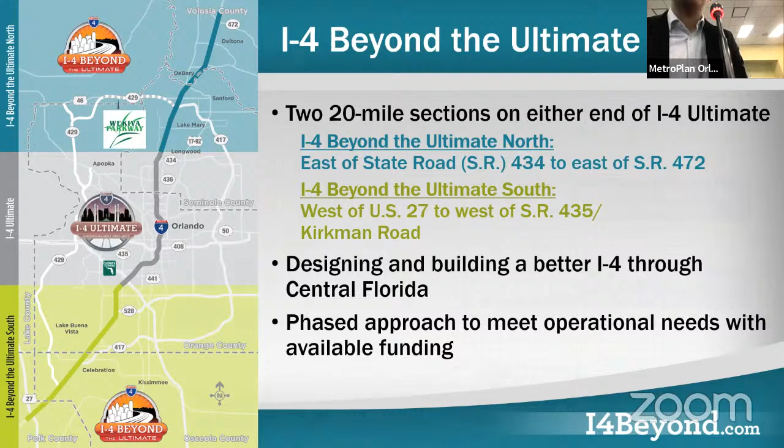So what you see on the screen is all that we have funding for as of now. Not all of these are in the TIP amendment, but we thought we'd go ahead and show you what we have in our funded projects. So we'll start with the first one on the top right. You have 444315-1. That's the I-4 at Sand Lake Road Interchange. We're improving the Sand Lake Interchange at that location. We are in active procurement as we speak. We expect to open bids sometime October, November of this year, end of October of this year.

Next to that, the 448-915-1, that's State Road 528 ramp widening. If you're traveling from the downtown direction on I-4 and you're taking that 528 ramp to I-Drive or the airport direction, in the existing condition, it's a single ramp. What we're seeing from the traffic analysis is that the traffic is backing up and backspilling into the I-4 main line. So the solution to that is to go ahead and widen that ramp to 2 lanes. So that's what we're doing. The project is in design. We expect that to go to construction summer of next year.

Next, the 441113-3, that's the I-4 at Daryl Carter Parkway interchange. It's a new interchange that actually got awarded a couple weeks ago, so we expect construction to start soon. And then the last one on the bottom, the 448-914-1, that's the I-4 at 535 interchange improvement. We are improving the interchange at that location, as you will see in the next slide. So that's kind of what we have lined up as far as near-term improvements.

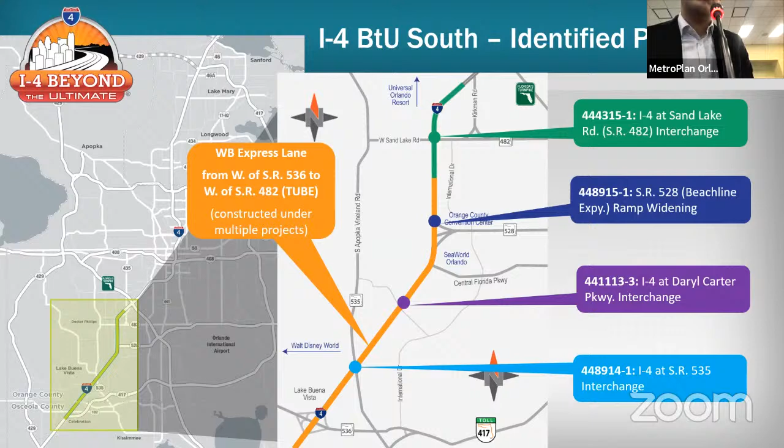To the west of I-4, as you can see on the screen, we are building a westbound express lane, a single westbound express lane, starting from Sand Lake Road all the way down to just west of State Road 536. That single westbound express lane is being built as part of multiple projects. So I'm gonna click next, and then you can see the small dotted boxes. Those are that single lane express lane in the westbound direction. It's just being built as part of multiple projects, just because of the location and the construction limits make sense to build it with those projects. So that's kind of what we have going on.

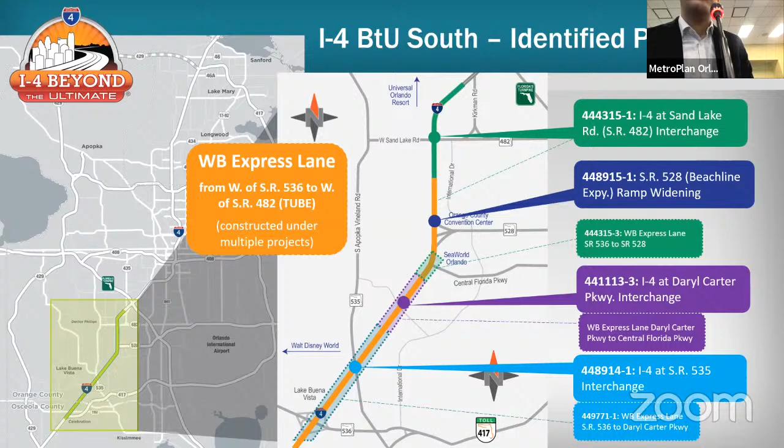For the purpose of the TIP amendment, we only have 4 project numbers. So the top 2, Sand Lake Road interchange and the piece of the single lane express lane, those are goes-with projects, which means that it's a single construction contract. It's a design build project. Again, we're in active procurement. We expect to open bids October of this year.

The 2 bottom ones are the 535 interchange improvements, along with that piece of the express lane that will be built with it. Again, it's a goes-with project, which means a single construction contract, design build option as well. We are looking to advertise for the design build procurement actually next week on that project. We're looking to open bids May of next year, as Catalina will cover in her slides. So with that, we'll go into the next slides.

One thing I want to mention about the Sand Lake Road interchange and the associated express lane, the scope hasn't changed from what you have seen last year. It just rolled forward from fiscal year 22 to 23. So the scope has not changed. It's the same as what you have seen before.

The bottom one, the 535 interchange, like Catalina mentioned, we were able to take advantage of the ARPA funding that we received and come up with a project that's ready. ARPA funding comes with constraints. For example, you had to have a project ready in fiscal year 23. Also, you have to spend all the money. So you have to design, construct, invoice everything by end of 2026. So a very constrained schedule, but we were able to get this project ready, which still provides the operational needs, and we think that is the right project for that location, as Catalina will cover. So with that, I'll turn it over to Catalina.

Also, like Adam said, we received stimulus funding, so we're working on the schedule and the concept as a design build project, so we're preparing our roadway plans and our RFP. We're also validating the traffic data to ensure that this project is gonna serve well into the future. We wanna make sure that we're getting the most benefit out of it. So what we are observing is that there are two main ramp movements that need a lot more capacity than what we have right now.

So currently, if you're traveling westbound on I-4, coming from downtown Orlando, and you want to get off at 535, that ramp is under capacity, and we're projecting that vehicles are going to spill back onto the main line of I-4, which poses a safety concern. So that was one of the key considerations for the design that we're proposing at this interchange. Also, if you are traveling northbound on 535 and you want to go westbound on I-4, you've got to get on those left turn lanes that are underneath the bridge of I-4, right there.

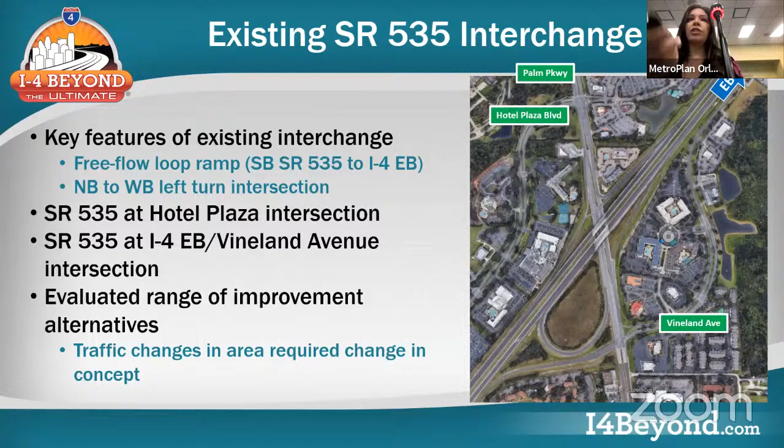And so we had originally thought of a proposed concept which included displaced left turns. So right now you will have to come to the signal up here and make the left turn. And we were proposing to do a displaced left turn, which will get that traffic turning left. We will move it out of the intersection before, and then you will be able to get into the ramp of I-4. However, while we were validating that data, we realized that that displaced left turn still was not going to be enough for the demand of that movement.

So at this moment, we're working on those critical movements and seeing what is the best concept that's going to serve the demands in this interchange. So we came up with an enhancement, if you will, of the original PD&E concept that is going to give us the most return on investment for this interchange, as well as service life for the interchange. So that concept looks like this.

So the proposed concept will include how we are going to address those two main critical movements that I just went over. I'm going to start with: if you're coming from downtown Orlando, you're going to get off at 535 in the westbound direction. We're proposing to realign that ramp. So we're going to realign it and also widen it. So we're going to provide that extra capacity that is needed.

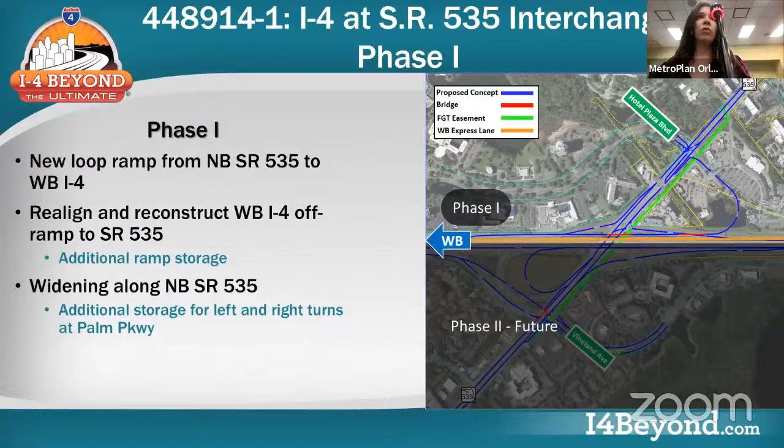So what are the benefits of phasing this project into phase 1 and phase 2? Well, we are continuing our westbound improvements. As you are all aware, we are building that westbound express lane from Sand Lake to 536. So we're going to be addressing the westbound traffic demand and the traffic concerns that we're seeing. As I mentioned, we're going to take care of those two ramp movements that pose safety concerns on I-4. The work along 535, the loop ramp, the ramp terminals, they are not going to be throwaway. They're going to be the final configuration when the BTU and the rest of the projects come through.

By removing the northbound left turn to I-4 westbound left turn lane, it's going to make it easier when we come back in the future and build the second phase of the interchange. Also, a big question in everyone's mind, I'm pretty sure, is this Brightline rail, what is going to happen here. So by building half the interchange, we're also allowing all parties interested more time to finalize and see where the rail is going to go in this area. Like I mentioned, we're also advancing the major utility relocation, and we are finally able to build this project within the available budget that we have.

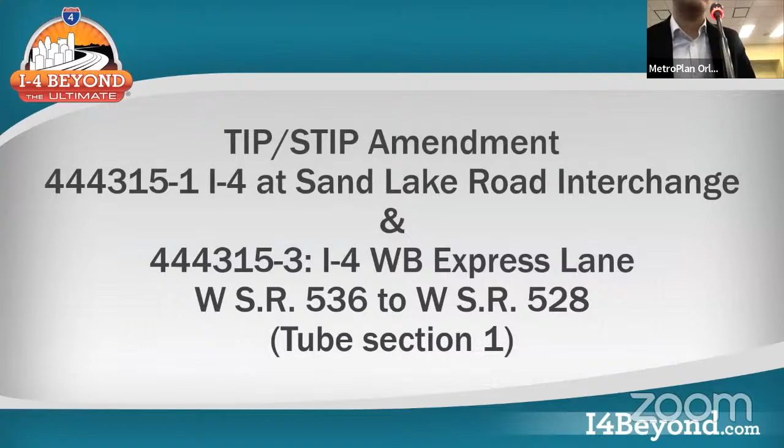Okay, thank you, Catalina. So Catalina covered 2 project numbers that you'll see in the TIP amendment. I'll go ahead and go over the other 2, starting with the other piece of that single express lane in the westbound direction, again being built as part of multiple projects. The project rolled forward from last fiscal year to this fiscal year, and that's why you're seeing it again today.

If you notice, the project limits for that dotted circle for the express lane overlap with the others. The reason is that based on current schedules, the Sand Lake Road Interchange project will finish last, after Daryl Carter Parkway and the 535 Interchange. So the last contractor out there will put the final friction course, striping, and tubular markers as part of that project. Based on the latest schedules, Sand Lake Road will do that, and that's why you see the overlap with other projects.

So that's one project. The next one is the Sand Lake Road at I-4 interchange improvement. It's the same scope as what you saw last year, just rolled forward from last year to this year. One thing I want to point out: although these are I-4 projects, we are adding significant value to the crossroads or local roads. For example, Sand Lake Road and Turkey Lake Road, if you're familiar with that area, it's very congested. If you get off I-4 westbound, traveling from the downtown direction, and take the exit to Sand Lake Road, you will see the weaving problems and congestion there.

So these projects add value to those roads. We're eliminating that left turn, and instead you'll just keep driving. If you follow that yellow line, you go over Sand Lake Road and then access Turkey Lake Road from that point, and there will be a signal there. So we are adding a lot of value to those roads. The same thing with 535: it's an I-4 project, but like Catalina mentioned, we're increasing the storage length at Palm Parkway and doing that free loop ramp to help with congestion on 535. Some feedback we got is that these are I-4 projects, spending money on highway, but if you look closely, we're actually improving the local infrastructure as well.

Chairman. Go ahead, Nabil. It seems evident that there is an absence of flyovers at this conflicting intersection, 535 and I-4. Why is that? What do you mean absence of flyover? There are other intersections that were simpler than this as far as the number of movements, and you see flyover. I think Sand Lake Road has a flyover, I believe. I think it might resolve that a lot easier than all this right-of-way area acquisition and so forth and so

on. So that loop ramp that you see there, it will have to cross over the westbound off-ramp. This area, as I mentioned, is the Crossroads parcel that FDOT acquired. So this area is needed for a water retention area, but we're also able to utilize it for this loop ramp and address that demand that is needed in this area. So while it's not a flyover, which will save us cost, it will be at grade, but then we will start to elevate at some point to be able to cross over this ramp here that's coming from I-4.

So there's not a need to acquire additional land? So the original PD&E, right, the original concept, we're staying within those limits. We're not proposing to acquire additional right-of-way or go beyond those right-of-way needs that we established a while ago. This is all within that right-of-way that was already envisioned for the BTU. So it's basically a cost issue? Construction is how do we deliver? That is one of the biggest challenges that we have.

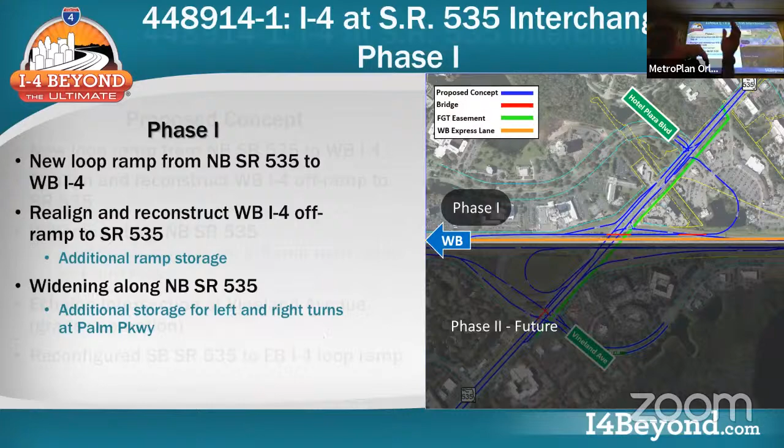So it just seems like that would be a concern from a traffic standpoint of just so much congestion on the right side. Because right now, it's kind of weird getting into Vineland. People want to get into Vineland, but you're wanting to get over to get on the off-ramp to go eastbound. But now everybody's going to have to be on the right side of the road.

So I brought this image here because it's a zoomed-in version, even though it has the overlay of what we consider one of the options for here. But one of the features that we're proposing here is, so there is a signal here, right? And right now, if you want to get on I-4, going northbound 535 to westbound I-4, you have to stop there at that signal. Yeah, right.

And that is causing, right, you have to split that signal into more phases. But we're gonna get rid of that, and that's gonna help this traffic coming from westbound I-4 flow faster and better. And also, with that giant loop ramp, we get a lot of storage there.

So we've run the traffic models. We have been validating the most recent traffic data that we have with those changes that we've been observing, and we're pretty confident that that's a pretty big loop ramp that is gonna get us that storage that we need. So in the final configuration there at Vineland, because the Vineland to eastbound I-4 is where there's a lot of conflict of people who want to get on I-4, but they're stuck in all the Vineland mess.

What do you do in there to resolve some of that? So you're talking about this area here? Yeah. So we're lengthening that ramp here. We're also adding another aux lane on mainline I-4 going eastbound. That is going to help with the weave and help those vehicles merge faster and safer, and push that traffic off 535.

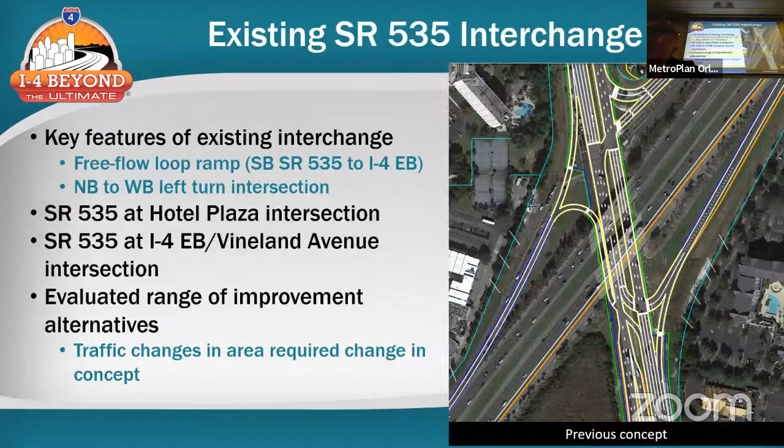The other question I have is on the tube part, where are the entrances and exits on that? Let me get to that image. You only enter... Is that what the red arrow is? So the red arrow is where I-4 Ultimate Express lanes end today.

Okay, yeah. So the tube is when we were doing our traffic analysis, we were realizing that there was a demand for vehicles that wanted to continue going west. They didn't want to get stuck in all of these interchanges here. So that's precisely why we call it a tube. This is your last exit point here, and then you're just going to continue. It's going to serve that through movement demand. It's really the through movement to get past the entire attractions area. Okay. Correct. I wasn't sure if that's what that meant, but okay, thank you. Any other questions or discussion?

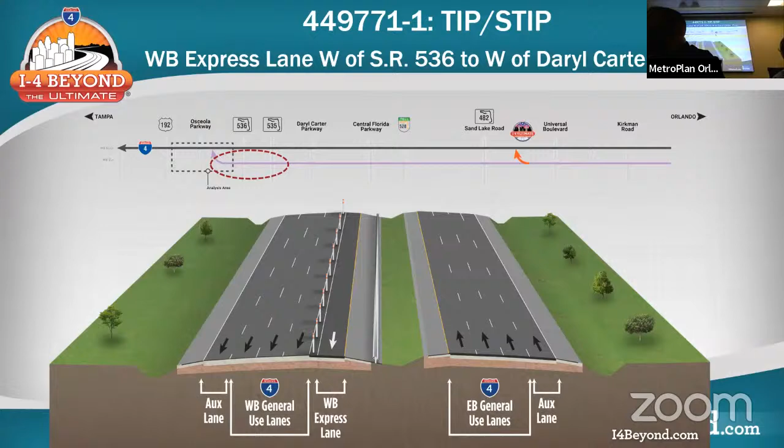Just had a question. Could you go back to the 535? So are there any remaining retail or restaurant uses in the Crossroads Shopping Center? You're taking all of that out. So there'll be no, let's call it westbound traffic going to Hotel Plaza Boulevard? Right. That entrance will no longer exist. There will be a T intersection.

Yeah, that actually may help that intersection because I think it's split phase right now. It's kind of inefficiently operating. So maybe, to your point previously, it may gain some capacity just through signal improvements. Great point, thank you. Yes, you're correct.

Movements serving that intersection in and out, so we can serve the other movements better. I don't know if we can do that at this point, during construction. We could talk about that actually, because you're right, we don't have a leg there anymore. There's no need for that through movement to go towards Crossroads, so let us get with our traffic ops department and we'll get back with you. Okay. So we can talk about when we can start optimizing that signal timing. Thank you. Any other questions for the discussion?

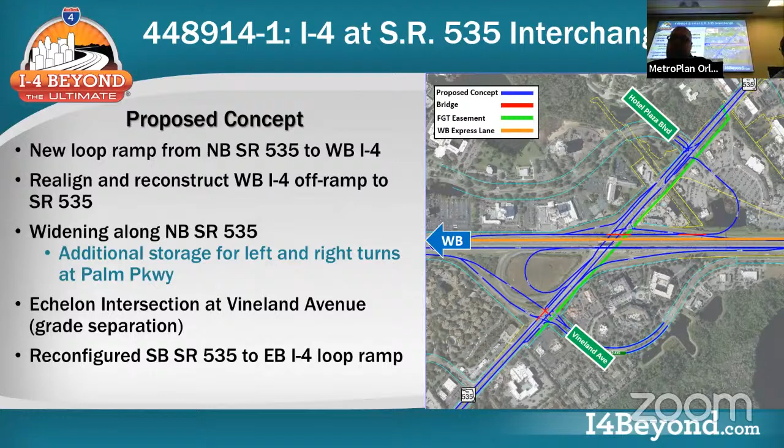All right, thank you for that presentation, addressing those safety concerns and congestion.

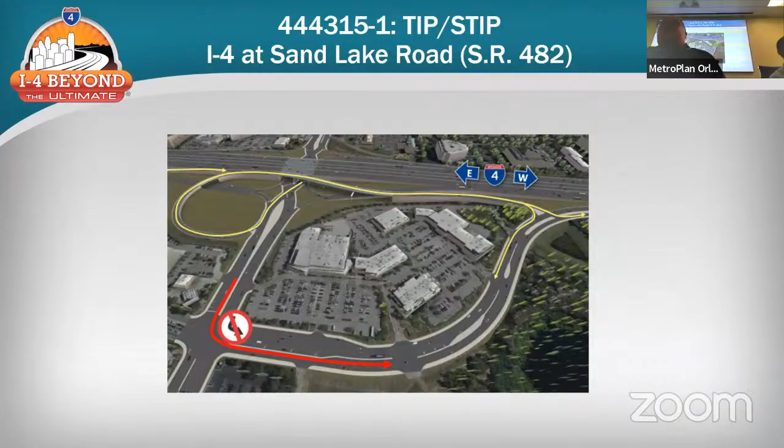And I want to apologize if you noticed that I smirked. I saw the heads going around when they were watching the pointers, trying to figure out which TV or which screen, you know. I just had this image of those videos where the cats are following the laser pointer, so that was why I smirked.

But okay, this is an action item, so looking for a motion to approve the amendment. Do I have a motion? Got a motion. Do I have a second? Smith, second. All right, motion and a second. Any further discussion? This is a voice vote. All those in favor say aye. Aye. Any opposed? Hearing none, motion passes. And Mr. Keith, one more left, right? Oh, that's it, all right.

Okay, so now moving on to presentations, status reports. We actually have two presentations today, and we'll hold questions until the presentation ends. The first presentation is on the FDOT District 1 Speed Reduction through Signal Timing Program, presented by Mr. Steven Davis, TSMO Program Engineer for FDOT District 1.

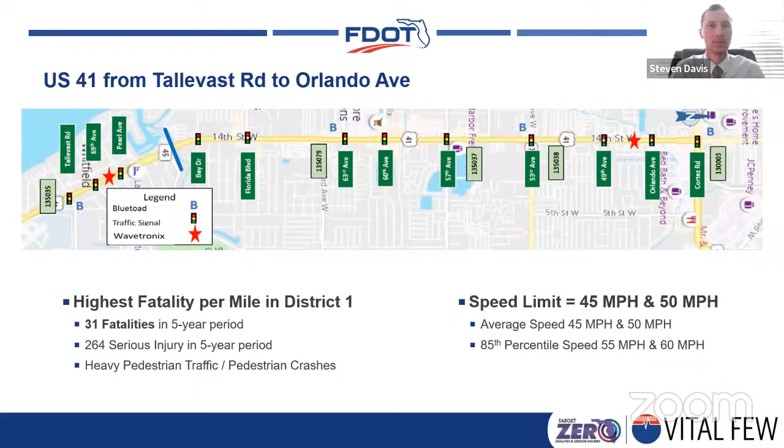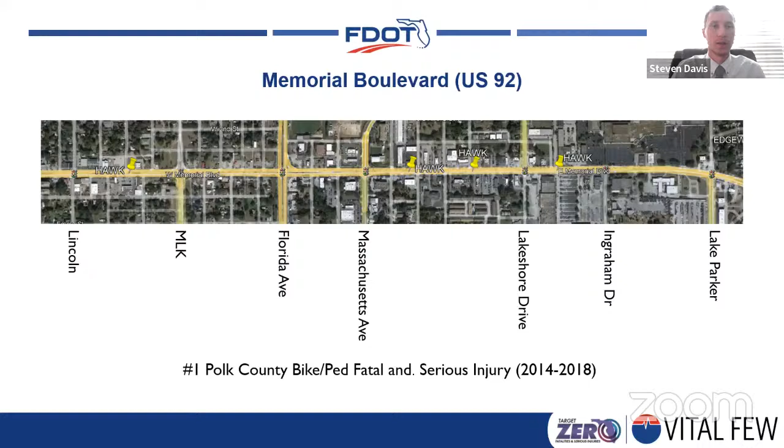We also looked at a second corridor as another test case. This is Memorial Boulevard, US 92 through downtown Lakeland. If you're familiar, it's kind of a similar typical section, 6 lanes wide, divided, with narrow sidewalks on each side. This is the #1 ped and bike fatality serious injury corridor in Polk County for this date as well. Next slide.

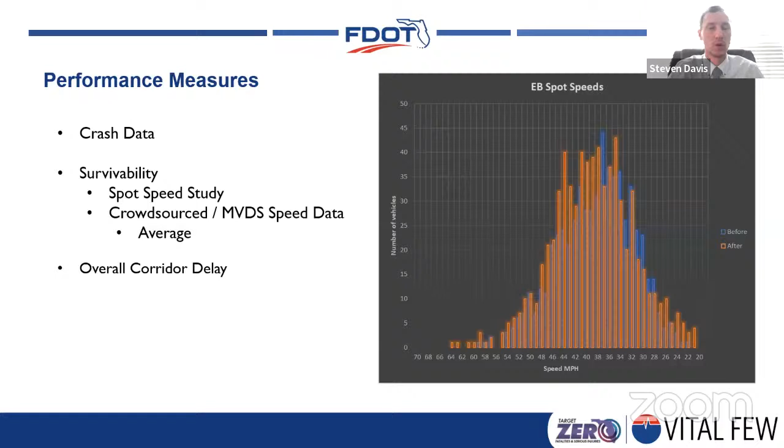So how do we do this? Essentially, it's pretty simple. Some of you may have tried these methods in the past. Really all we did was we adjusted the offsets on our timings. We reduced the green bands by reducing cycle lengths, and we reduced our progression speed. Our initial goal was to reduce the operating speeds by 5 to 10 miles an hour. And so we did that by essentially constricting vehicle movement through the offsets and the progression speed.

So we reduced cycle lengths, fully well knowing that we're going to have added congestion, especially during peak times and during peak season. We wanted to balance the use of the corridor with the roadway users in the context to lower ped delay, and hopefully encourage more of those peds to cross at the signals and less at mid-block. And along with that, we implemented LPI as well. Next slide.

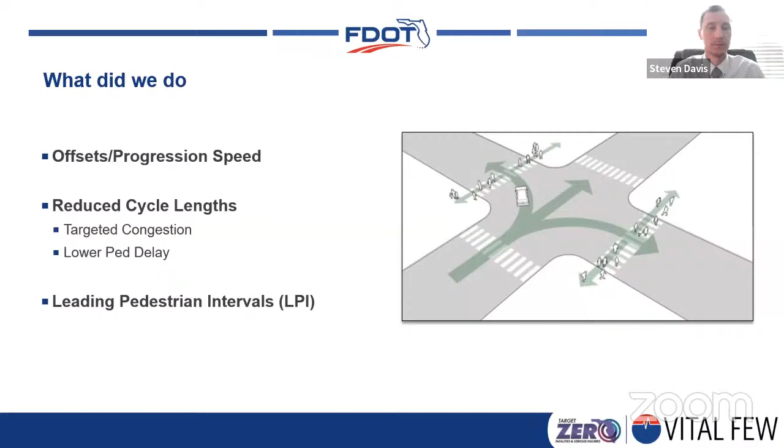So what did we see? In our initial changes, we were running upwards of 180-second cycle lengths in some of these segments. We constricted those down to as much as 120, 130 seconds. So it was quite a squeeze. But doing so, we were able to see a 4 to 8 mile an hour speed reduction, which doesn't sound like a lot, but it amounts to about a 15% change, which we were pretty pleased with. You can see the tables there on the right.

Numbers might be a little tiny for you, but you can see where a lot of the biggest gains were in the evening plans, which is good because that tends to be the time when there are more ped crashes because of reduced visibility. Our travel time went up 20 to 90 seconds, up to a 20% increase. You can see one of the segments there, the southbound weekend travel time comparisons went up.

And then we monitored performance, and we continue to do that and monitor crashes. You can see the number of stops we added. In some cases, there was an additional 2 stops in the evening plans through the same corridor. And so you're balancing convenience and speed for safety, essentially. And we measure that through the crashes. So next slide, please.

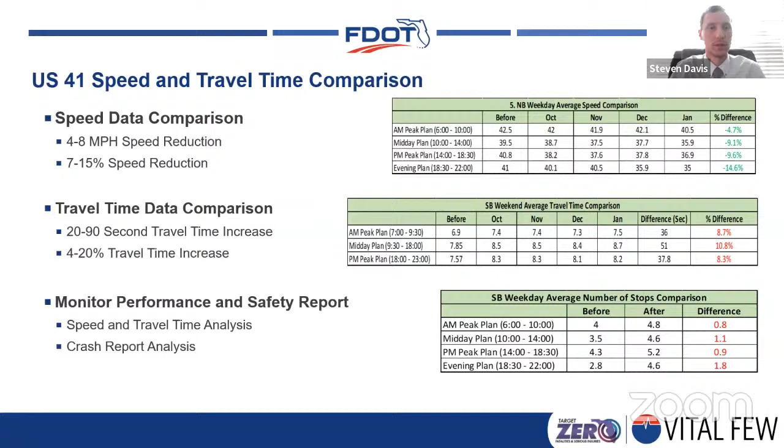So this is just an example of where this type of application needs to be closely monitored, to make sure that it's achieving the desired goal. So next slide.

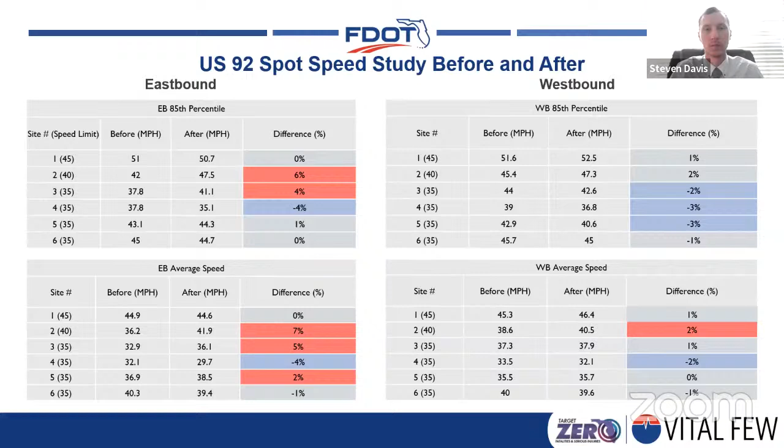So lessons learned. Essentially, what we pulled from this over the past year or so is it requires a heavy-handed approach. It takes staff time, analysis, as many things do, but it also requires active arterial management. So both of the corridors we selected are connected back to the STMC. They are actively managed with ATC controllers. They have good detection. They have CCTV cameras so that traffic can be observed and timing adjusted as necessary. They're all in coordinated systems. So AAM is pretty much a necessity.

It's not necessarily suited for a blanket approach. Like we saw with the 92 example, we're kind of seeing that this is more applicable in certain conditions. Typically, what we're thinking now is it's more suited for arterials where the signal spacing is greater than a quarter mile but less than a half mile, so you can have greater control over the speed and the platooning of the vehicles and progression, but not causing too many stops and undue delay.

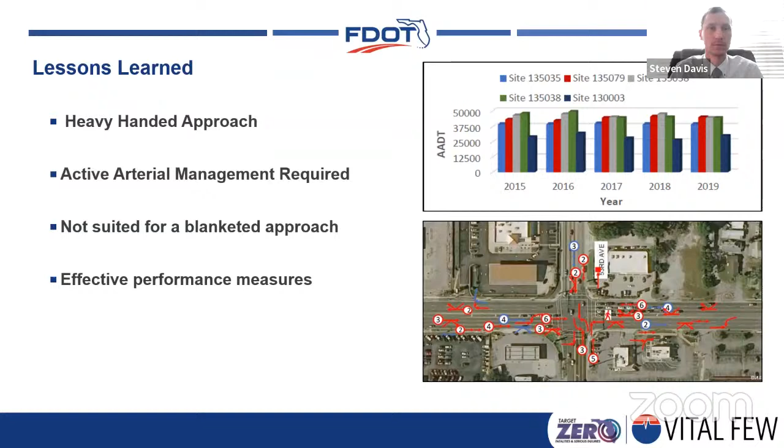And establishing effective performance measures. So really it comes down to speed and the changing crashes. So next slide. Next steps. So things we want to do going from here. We're considering trying some unique things during late night operations. Currently, both of these corridors go into free operation late at night. So we're considering going to recall on the side streets or even possibly a four-way red. That's a maybe. We're still considering that. Half cycle metering possibly on 92 to try that out to continue to reduce speeds.

We'd like to get into a benefit cost analysis. So number of crashes reduced versus the amount of congestion induced would be a great BC picture to look at. We're expanding into other corridors. We're going to try this in other contexts. We've got 4 new corridors identified in several other counties that we're getting ready to do initial analysis on to try this. Not just in urban areas, in rural towns and suburban. We want to try to spread things out and see if those types of contexts have any effect on this type of initiative.

Other performance measures, of course, we want to try to use areas where we have the most data available as possible. So ATSPMs to monitor red light running in case this encourages people to speed and run from light to light if they do get caught more often than they expect. That's one thing we are concerned with. And using AI-based software for adaptive signal timings or counts to help us understand speeds and things of that nature.

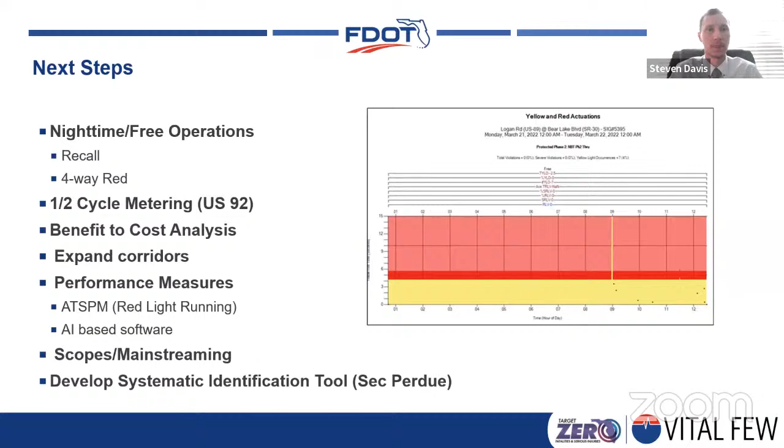So I want to end with this. We started off with crashes and we'll end with one. It's kind of a powerful message. This crash was on March 2nd of this year. We started this signal timing technique, I guess you could call it, back in October of 2021. And these timings were well established by then. This was during peak season. This bicyclist was crossing the road at Gaines Avenue and US 41 on that Manatee corridor, and they were hit. They were in the crosswalk, and they were responded to by EMS, taken to the hospital, and they survived.

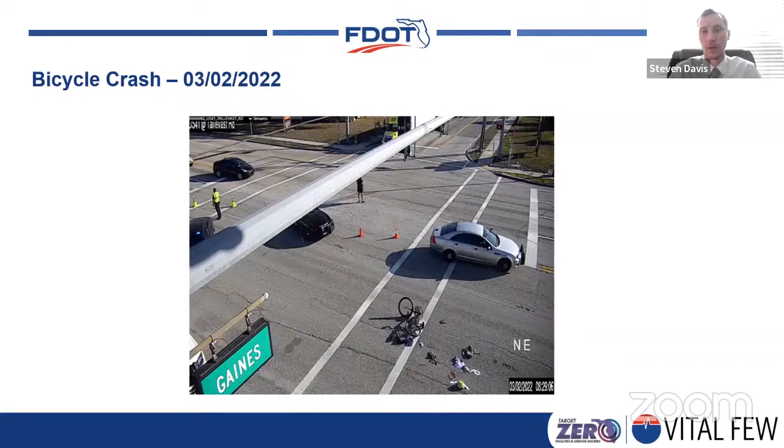If you're not familiar, this is the very extreme end of the corridor, the end where there's higher speeds. And we would like to believe that it's possible that this person's life may have been saved because of these timing changes we made. We don't know that for sure, but it's highly possible. And that's the kind of thing that we're trying to make a difference on. We know we can't prevent every single crash, every single conflict, but we do know that inevitably when those events happen, if we can increase the survivability, then perhaps we can start to make a difference. Next slide.

So with that, I'll take questions. I'm certainly not a signal timing expert. If you have anything specific that you want to ask, I can certainly connect you with our investigators, Neil and Sam, and get those detailed questions answered. But any questions about the project? Any questions for Mr. Davis?

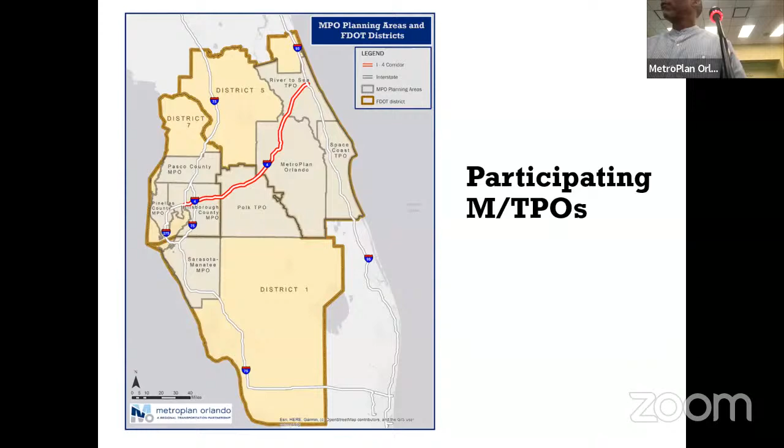And initially it was the I-4 corridor, but it's become the I-4 corridor travel shed to advance TSMO through planning, not deployment and implementation. And we have started this program, and it involves the MPOs that are listed here, including each of the districts, District 5, 1, and 7, as well as the Turnpike, THEA, which is Tampa Hillsborough Expressway Authority, and CFX, to advance TSMO through knowledge sharing, through talking about programs, through having regular meetings.

Some of the accomplishments, real quickly, we've established memorandums of understanding between all the MPOs to allocate staff to work towards this effort. We've created a working group that meets regularly. We've put together some applications for awards that we've won. We were awarded a State Transportation Innovation Council grant for $100,000 for this effort. The National Institute for Congestion Reduction at University of South Florida: we teamed with the Center for Urban Transportation Research to receive an award from that grant as well.

And then more recently, we partnered with CUTR again on a DOE grant, and that is to look at evaluating automated vehicles using current technology, older technology, and seeing if that can still be used as opposed to making the investments in the future.

The working group, we've established goals and objectives for the working group. Again, we meet regularly. And we did a survey of all these MPOs on what they would like to see through this program. Knowledge transfer, which is what we've been trying to achieve through our meetings, and the format of our meetings is that we have someone nationally give a presentation on TSMO, someone that is rich in TSMO, and then we ask one of our local agencies to talk about their TSMO program. So that we have been meeting.